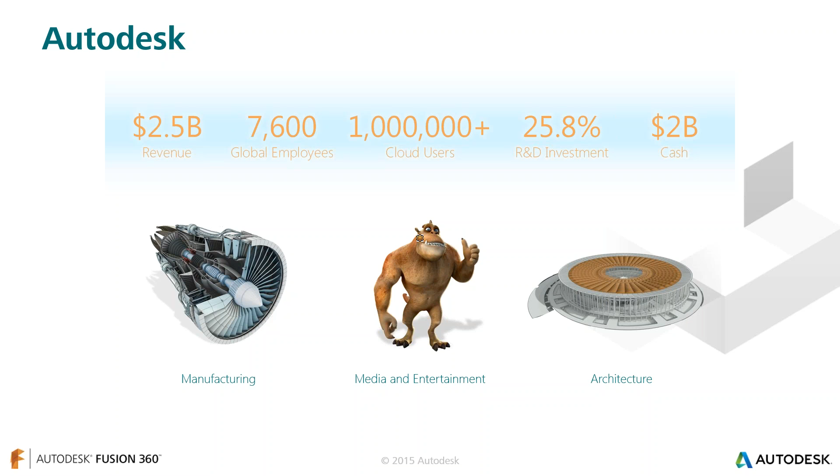Now, there's a very important statistic on the slide because it involves all of us: 26% of Autodesk's revenue goes back into R&D. This is the reason we're able to bring you Fusion 360 today. So as we dive in and showcase the tool for you, you'll see why we believe Fusion 360 represents the most exciting, important, relevant story in our industry today and into the future.

So let's start with business challenges. Traditionally, the software industry has been all about the status quo with typical CAD tools. I'm sure everybody feels the same. Everything up until now has been built on technology that got the job done, but eventually for your business to evolve as a true 21st century competitor, customers expect to go to market at a more rapid pace with more efficient costs than ever before. So there's a need for all of us to be more nimble.

It's true for any industry that we encounter hurdles that can be extremely difficult to overcome on our own, which is why at Autodesk we've identified a need for a product that provides an option for companies to collaborate more seamlessly with colleagues and customers alike. Everyone was using separate and disjointed tools with limited access and flexibility, and typically these tools were tied to a PC, so the overall experience could often be cumbersome. So we made it a top priority to address this and design a tool that has the potential to transform the industry by being able to not only work on any device—Mac, PC, tablet, or smartphone.

Our CAM software is built in so additive manufacturing can become a reality. To provide a little more context as to how we came to this point, we dug in and did extensive research, speaking to people in the industry to get a feel for their pain points. Many of them are colleagues of yours, and some of the responses are reflected here, but overall it was feedback like this: I'm spending way too much time on updates and managing our tool as opposed to designing. I want to get the technology out of the way and focus on being creative.

When we talk about integrated product development, everything gets done under one roof. There's no jumping from application to application—it's all integrated in a tight package with Fusion. When you get your design, you engineer it and make your changes, then it automatically updates for you, while at the same time on the back end all of your data is being managed.

And you can go back at any time and collaborate with people from any device, ask them to take a look at it, share notes. If you have an idea in the evening at home or on the train during your commute, you can access it from an iPhone or on any Mac product. This is unprecedented.

Although this is cloud enabled, it runs local on your workstation. So if you lose your internet connection or want to work from an airplane while you're traveling on business, it works in offline mode, then updates when you log back on to pick up exactly where you left off. You can start your work in the office on a PC, then leave, go to dinner, and pick up where you left off on your Mac at home. Fusion does not care what machine you're on. This is the future of making things, and it's all part of the Autodesk Product Innovation Platform.

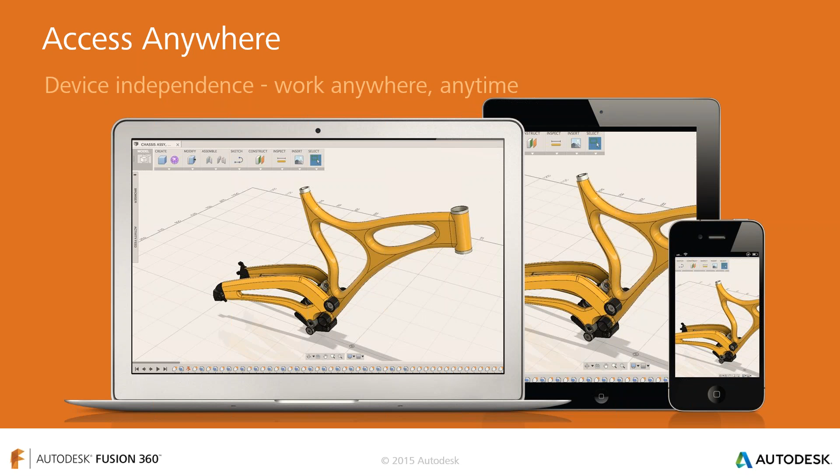Thanks, Matt. I trust everybody can see, should just see a blue screen right now. I'm just going to do a quick logistics check. Yes. And Steve, you and Matt can hear me okay? Yes, sir. Okay, great, fantastic.

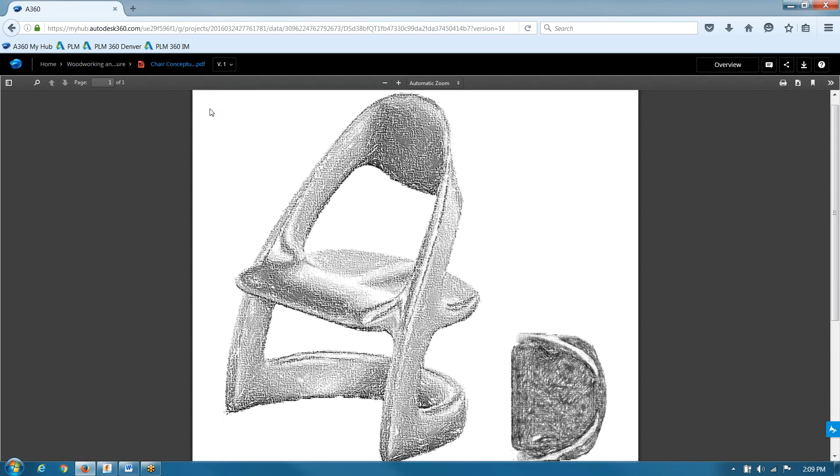What I'm going to use today as my subject matter is a wood chair that was given to me in a pencil sketch. He was nice enough to give me the traditional top, front, and right views. I'll have to admit that I'm not in any way artistic or creative, I'm a mechanical engineer by degree or affliction, a lot of people would say. So I want to show you the tool. I wanted to use a data set here that would resonate with you, and I talked to Steve, and he thought a sculptured chair would be appropriate.

So I'm going to jump right into the authoring tool. This is Fusion, and the first thing I would like to do is go and retrieve that image that was given to me for this project. In Fusion we call these canvases, and the idea is that we want to be able to look at these canvases, trace on top of them, and make our designs. We can change the opacity for it, set it up so that we can select through it.

And we do have a tree. I don't want people to feel like they're out of sorts. This browser tree on the left-hand side shows not just the canvas, but everything that's going to be in our design. So it's very easy to get used to Fusion, it's going to be very familiar.

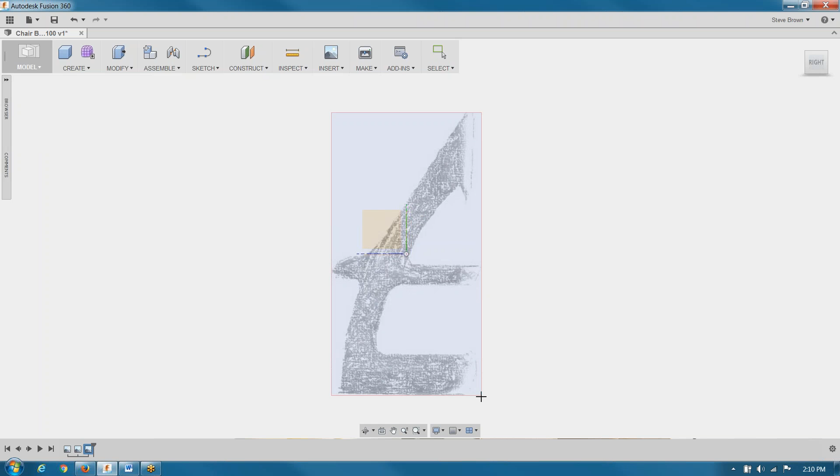The canvas came in, the image that you inserted, you don't know the scale. It's very easy to simply calibrate it here in Fusion. I know this is 36 inches tall, so I pick 2 points and specify that it's 36 inches tall. The canvas can also be moved around, I like to have things kind of faced around the origin. Maybe it's my technical background, but we have a few other canvases in here as well, so it's nice to have them.

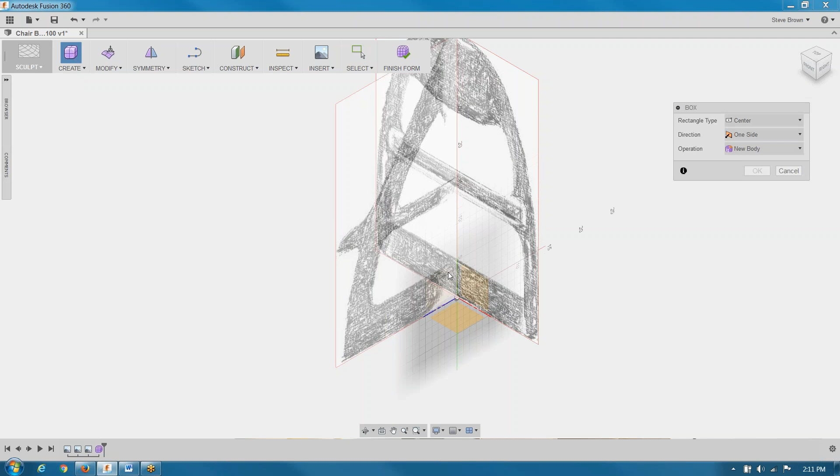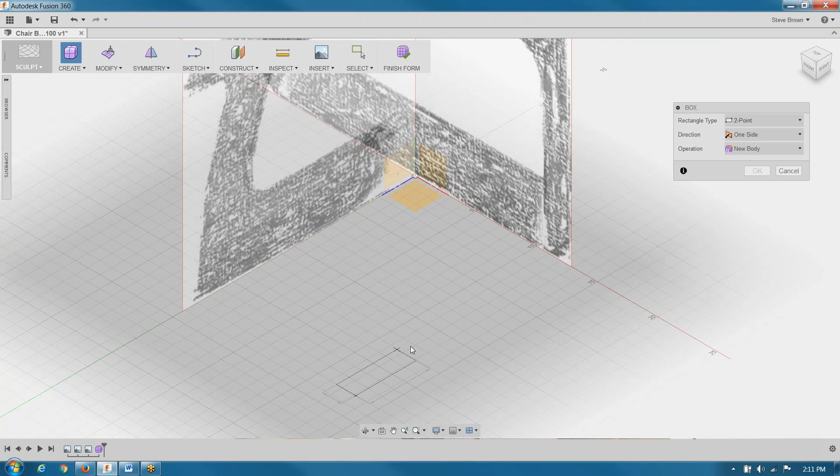Now, in the past, I probably would have started with guide curves or maybe some path geometry in parametric modeling. Being a machine designer, that was sort of what we knew, lofts and sweeps. I'm just turning on a couple of the canvases here, and I'm going to start with an actual piece of geometry, a little cube here. You'll notice in Fusion there's pull and push handles on everything you create. There's also a dialog box you can use if you want to type in exact numbers. It's your choice. I'm going to use 2-point and use a quad box here.

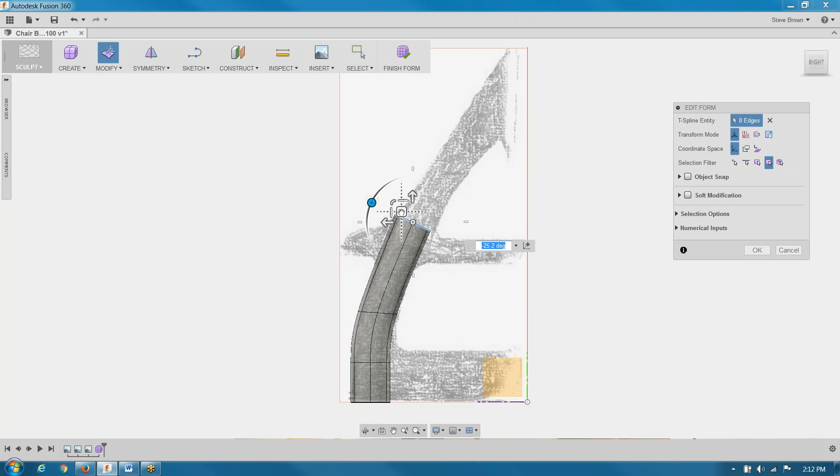So I'm just going to start by shaping this essentially how I would have probably sketched the guide curve. I would have gone in here by hand and sketched a spline or a series of tangent arcs, but this time I'm going to do it directly in Fusion with the geometry. I just start with that primitive and start pulling it around. Switch to a front view, pull the leg in a little bit. I know it's going to arc around across the top, so I'm going to go ahead and rotate this just a bit.

We're going to be doing a lot of this, and we'll go through some of the finer details of what we're doing when we move this information. But suffice to say, I can move edges, faces, or vertices independent of each other.

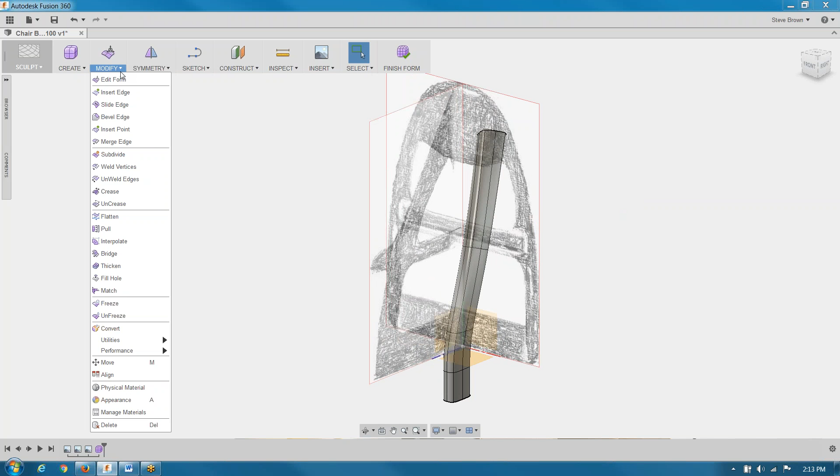Now, this is a symmetrical object. I don't think that's a great leap of faith to go through. So I'm going to set up some symmetry here, using the mirror duplicate command. But I do want to point out the size of the tooltips here. When I started using Fusion, I came from a parametric modeling background. Much like many of you, I've used Inventor most recently, but I've also got a background in SolidWorks, the Creo tools, and others. So the idea of mirroring and symmetry is very familiar, everybody's pretty comfortable with that. It just means that now when I modify this shape, I'm doing it on both sides.

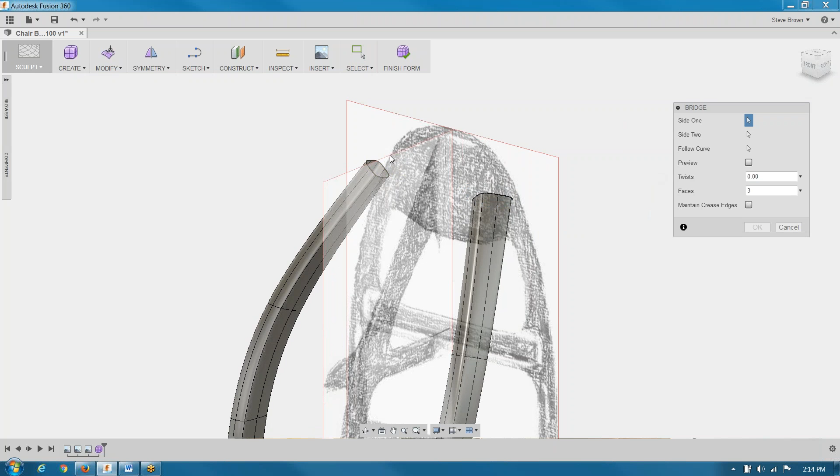I think I'm going to start by connecting these two sides across the way with a bridge. Now that gives me the smooth crossing. Again, there's faces here that I can now manipulate.

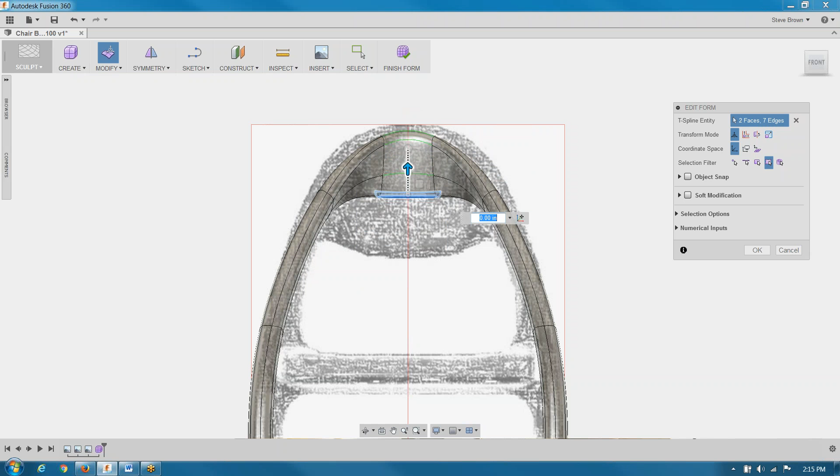I'm going to start just by rotating it up to create the seat back, maybe move it up a little bit, just kind of looking at my sketch. And we'll come around the front and start doing some similar drags and pulls. Again, you can see how when I cross faces, I pick faces inside the box, I pick faces that are crossing the box. Very similar to any kind of Windows functionality that you're familiar with.

So I'm going to just kind of pause here for a second. I'm going to go slow so that we don't get any kind of delay. But I'm just doing this by eye, okay, I'm not really dead set on specific numbers. I'm just trying to get the shape and form down to be something that's close to the artist's sketch.

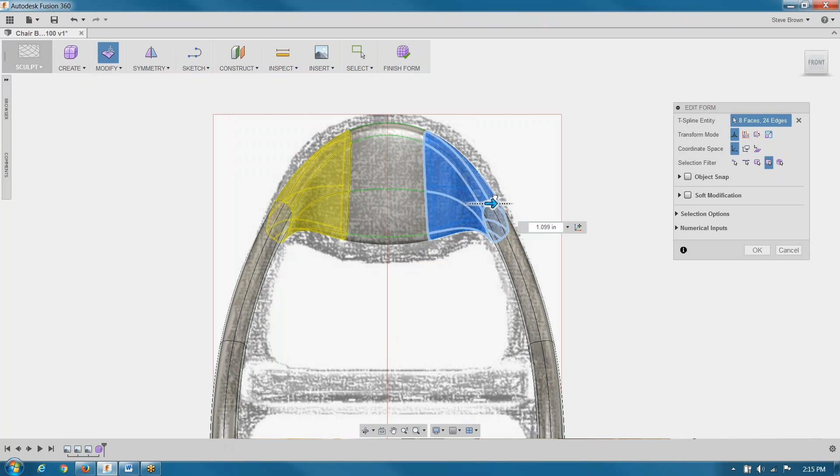It's all about just getting some ideas out here on the paper quickly, right? Let's talk about getting ideations out without having to worry about the tool so much, just getting them into a form that I can work with. I think that looks pretty good to me.

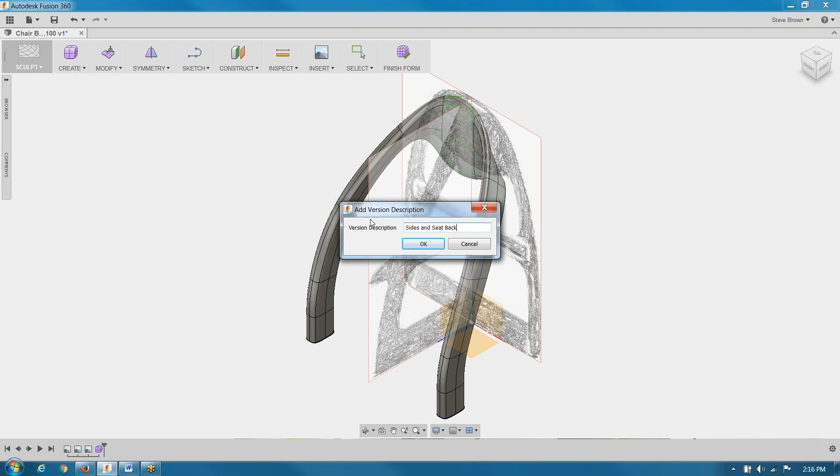So I'm going to go ahead and save this. Now you notice the comment I'm writing, it's going to go with the version. Data management is built into Fusion. It's not an afterthought, it's not a tack on, it's not a third party, it's actually built in from the beginning. Those versions are kept. I don't have to do anything overt, I don't have to check in, I don't have to check out. I just simply save and put a comment, and my thoughts are recorded.

Now I'm moving this edge down a little bit. I'm going to work on the seat bottom. Pulling the edges around really gives me good control, but sometimes I want to add an extra edge to give more control. The toolbox here, the little sculpt toolbox that pops up, that's just my S key. It's great, it pops up right where my mouse is. I don't have to go searching through menu bars. I can type in a couple of letters and it gives me all the corresponding commands available that start with that. In this case, I'm inserting an edge.

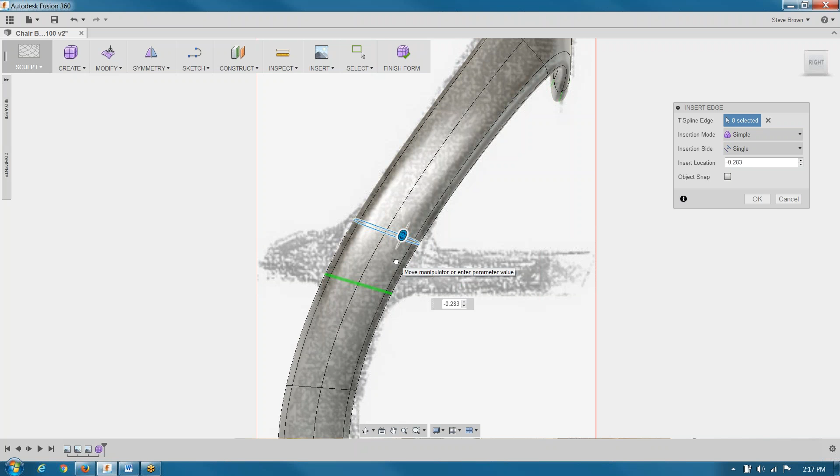I can insert one edge on either side of the existing, I can insert two. I think I'm just going to use one in this case, and we'll move it about here, should work. Again, all these edges can be moved independently after they're created. They're not locked into position in any way.

Now, the reason I'm doing this is I want to delete some faces. Just pick a couple of faces and hit the delete key. Notice how Fusion automatically rounds off the hole, looking for that curvature continuity. If you notice when I was dragging, Fusion was doing the same thing, trying to make sure all the edges maintain that smooth curvature.

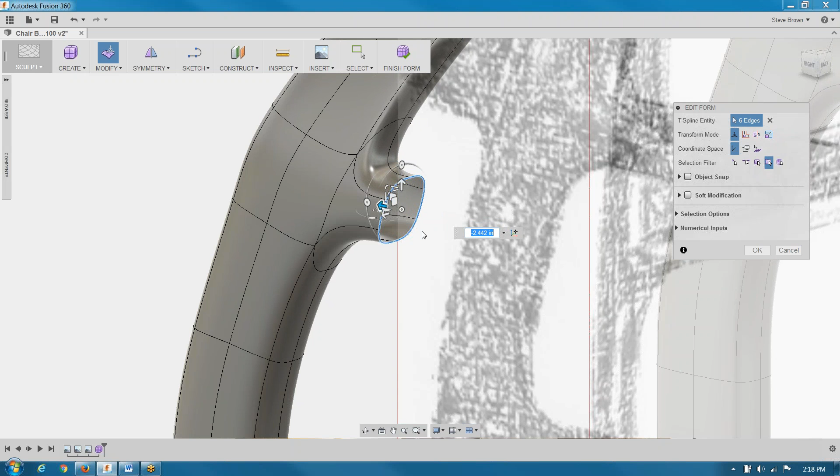Now I'm just going to pull this out a little bit to try to get some material to build my seat bottom. I'm going to stop right there and take a look at it from the right. If I want to straighten this up a bit, I think that would be a good idea. I'm not trying to match it exactly, but keep in mind that moving edges, faces, and vertices is all based on how you select.

So here's this leg that's just sort of sitting out. If I just grab those pieces, I could move those around. You can see how the corresponding geometry follows my lead, keeping curvature, keeping that smooth shape. For me to do that in the past in parametric tools, how many guide curves or path profiles would I have had to change there? I shudder to think - I probably couldn't do it.

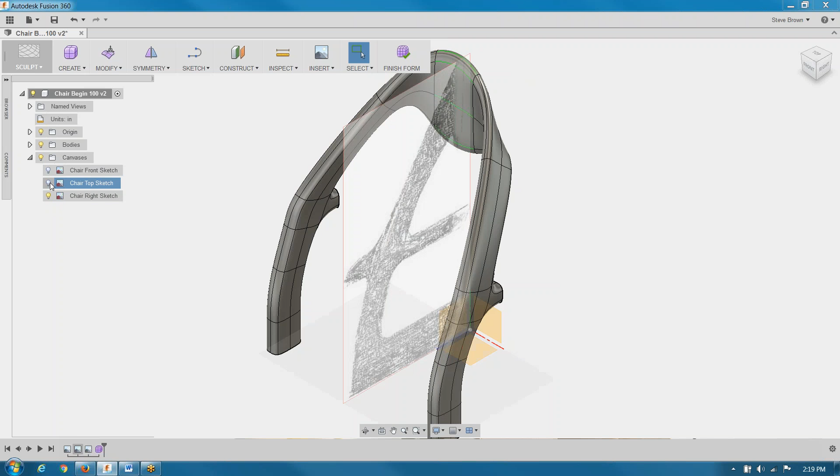Now, before I start working on the back of this seat bottom, I'm going to turn on my other canvas - I have one down on the floor there. I'm also going to use a section view, just for the sake of visibility, to minimize the amount of information I'm looking at. I'm not cutting my model in half, this is purely a view control. In Fusion, we call them section analysis. Again, you have tick boxes, you can type in exact numbers, but I prefer the pull handles - it just makes life a lot easier.

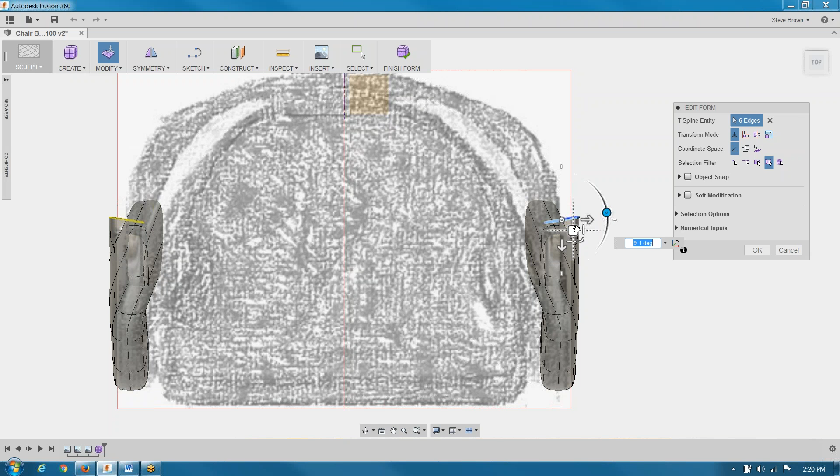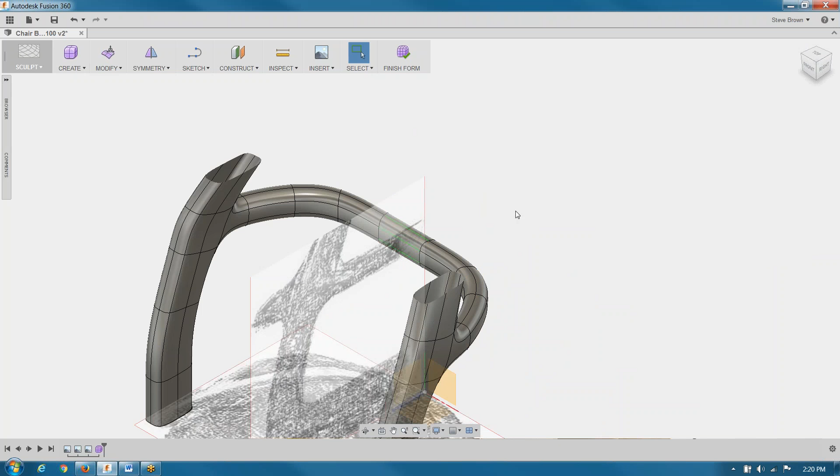So much like I did before, I'm just going to rotate this edge a little bit and start pulling just to get a shape that I think I can work with. That looks pretty good. I'll use my shortcut key because I have the bridge command on there, which is one of my favorites in here. Hopefully we'll get some things to go off and we can look at some recovery. But so far, all the shapes that I am doing are coming out exactly how I had envisioned them.

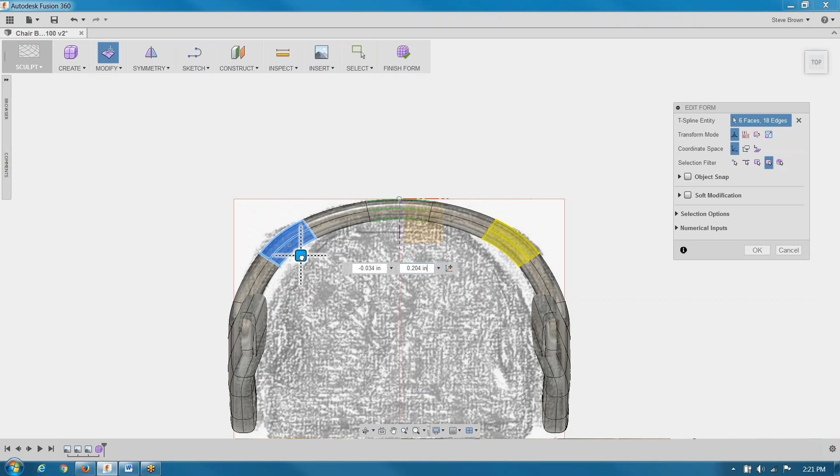Notice the manipulator has arrow handles that pull in the direction of the axes, right? So I can pull in and out, I can move in a specific plane. When I'm pulling on these, you'll see that's what I'm doing most of the time, pulling things in world coordinates. You can use local coordinates, and you can define your own. The center pad that I'm hovering over now moves along that plane, but I'm not limited to a specific direction, so I'm staying parallel to the screen here but able to move those faces in that direction. The same manipulator is available for edges, vertices, and faces, which is something I really like about Fusion - the consistency of the interface.

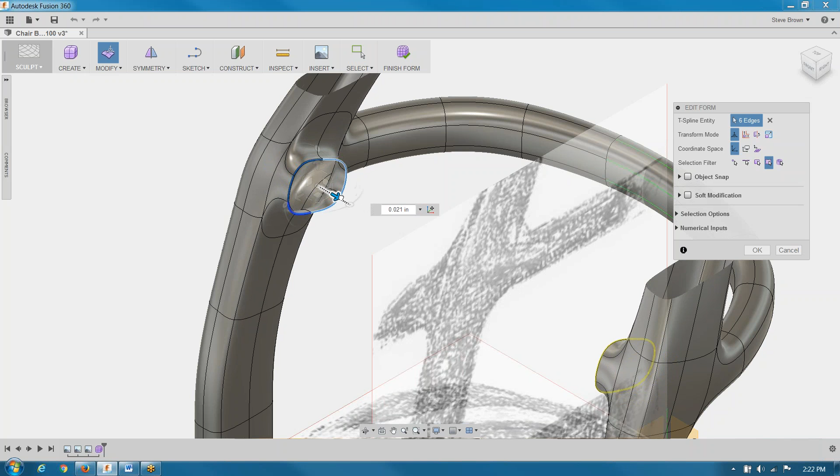So I'm going to save this again, creating another version automatically here, and we'll start working on the front here. In much the same way, I'm going to pull the front of my seat frame across. Now I'll stop midway and just start manipulating this.

In this case, I'm going to use the manipulator that's the scale - it just scales in the Z, so in my views in Z here. So we can move, we can scale, stretch, all with the same manipulator. And we'll bring that across.

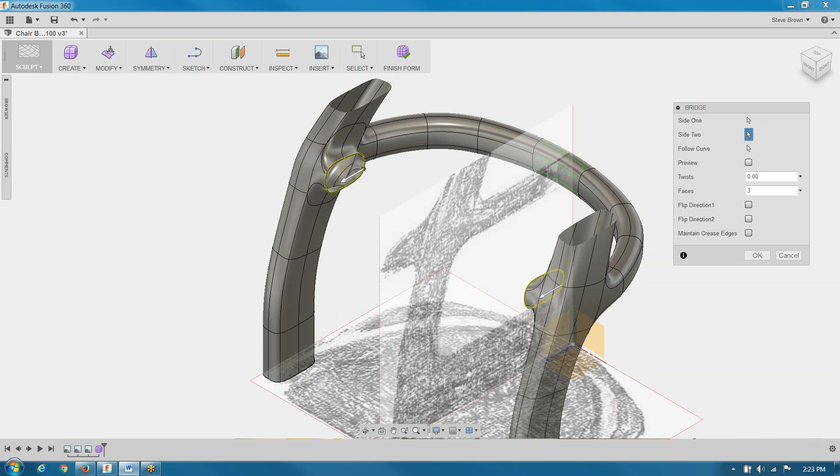Nice. Now, I wasn't too concerned about that one when I positioned the profiles, because I know I can always come back in here after the fact and edit these as a group. So just looking forward on the chair, I can pull this down and take a peek to the back, and I want it to be roughly the same level as the back. It's not critical, because I'm just going for a very friendly shape, not so much a hard-edged engineering shape.

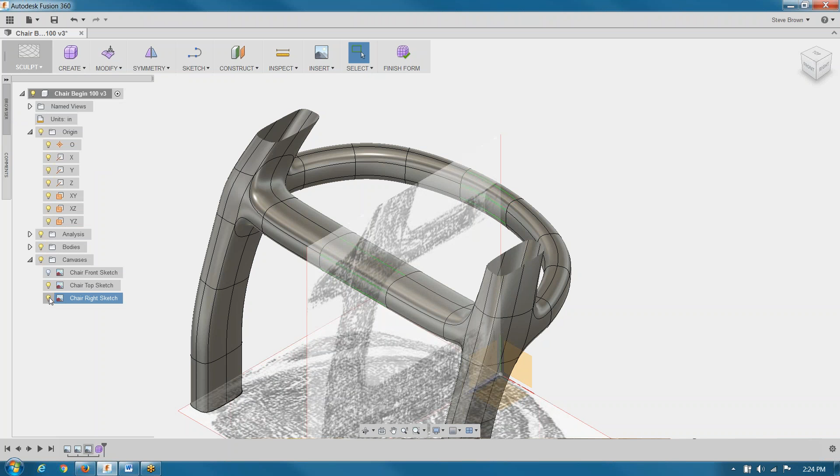I'm going to turn off that right-hand canvas. I don't need that anymore.

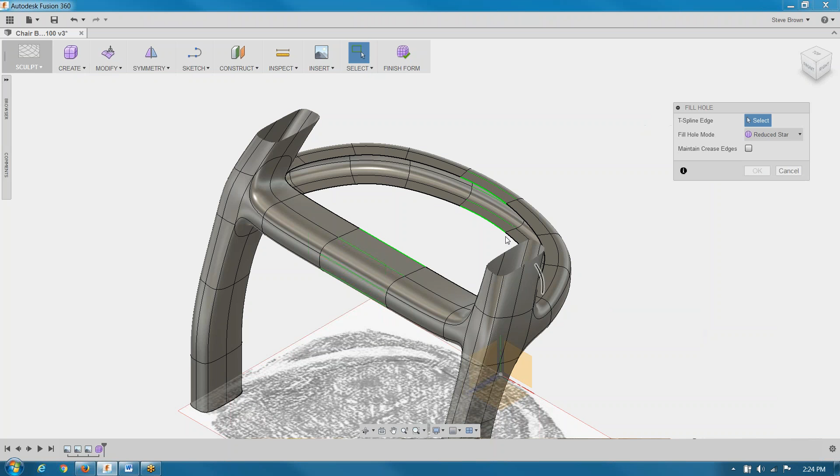Deleting a ring of faces now allows me to work on the inner seat area. In this, I'm going to fill that gap with the fill hole command. Again, it's just select a single edge, and we get this surface in here. There's a couple of options you can take in here - I like the reduced star, and we'll throw that in. Then I'll just repeat the same command for the bottom.

I'll save another version.

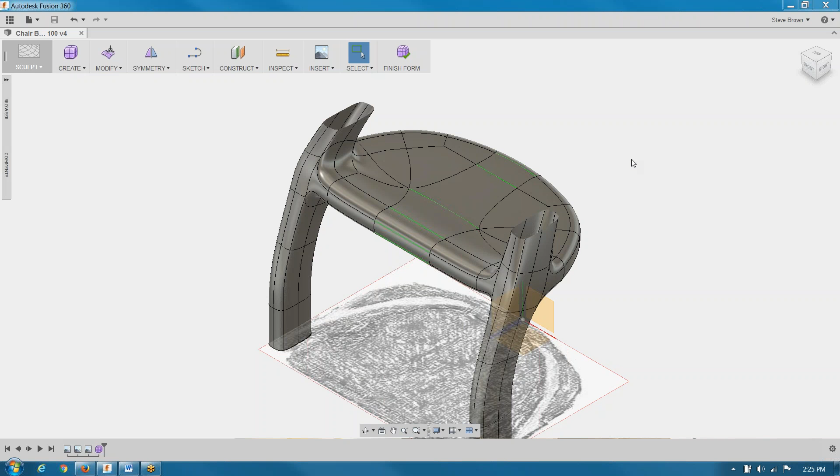I was glancing over at the chat and haven't seen anything come in, so this is good news. I'm going to continue here and work on the seat bottom a little bit. Keep in mind that when you have large faces like this, you can't exert a whole lot of control on them, because you're going to be pulling those entities up all together.

So you see how I've created faces before by dragging. This time I'm just going to subdivide this up into multiple faces, and I'm going to specify that I want 3 faces in one direction, and no subdivision in the other. So where I had 3 large faces, I now have 9 smaller ones running in the direction that I desire.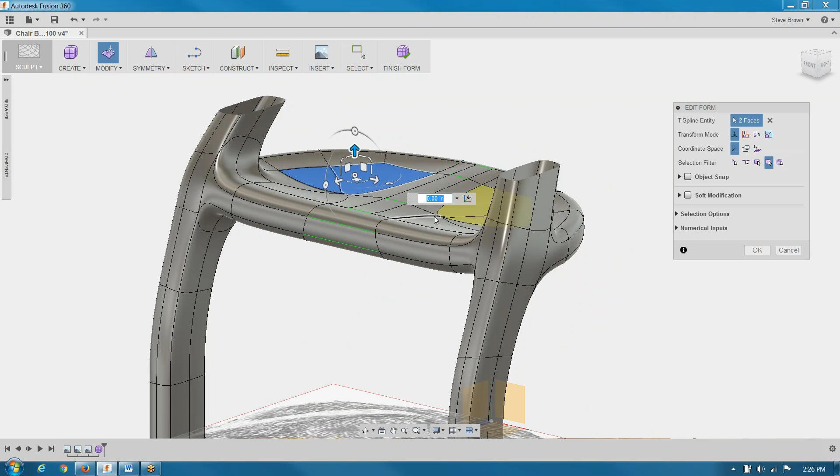The reason for that is I want to take these seating areas here, and I could pick more faces, or I could probably even do it with edges if I like. But I just kind of pull this up, pull it down. I just want to get a nice curvature to the seat bottom, nothing drastic, just very gentle. You see how it maintains that curvature with the three faces in the middle that I created, and it just spreads that gradual curve out across the entire bottom of the seat.

Now, optionally, I could do the same thing on the front of the seat to the leg arches. So I'll just pull those down, and we'll kind of peek back. Again, I'm just doing this by eye. I'm really looking at the angle that this sort of fades back, and that fall off looks pretty good.

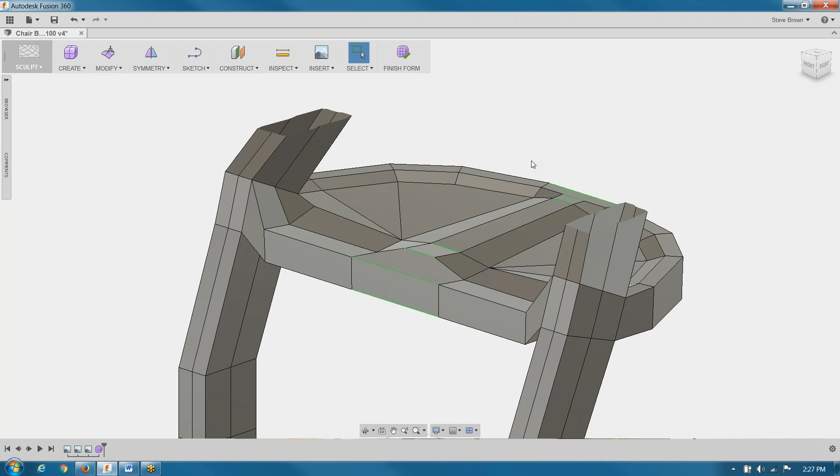Now, I do have a little higher section here, and I want to take advantage while I can to point out that we can switch to polygonal mode as well. So if you're comfortable working in polygons, that's now like a Fred Flintstone seat. I'm intentionally switching back, and I can really see in this mode, Fusion gives me a strong insight into the vertices and edges that are going to be most effective at smoothing out that hump. So I'm just going to use that mode to pull that up, put it back into smooth mode.

And I'm going to call that money.

Now, I was pulling edges before and faces. I'm going to do that again, a little slower this time. You notice when I pull these three faces out along this axis, I'm going to pull them directly, but I sort of get that flying buttress effect there on the uprights.

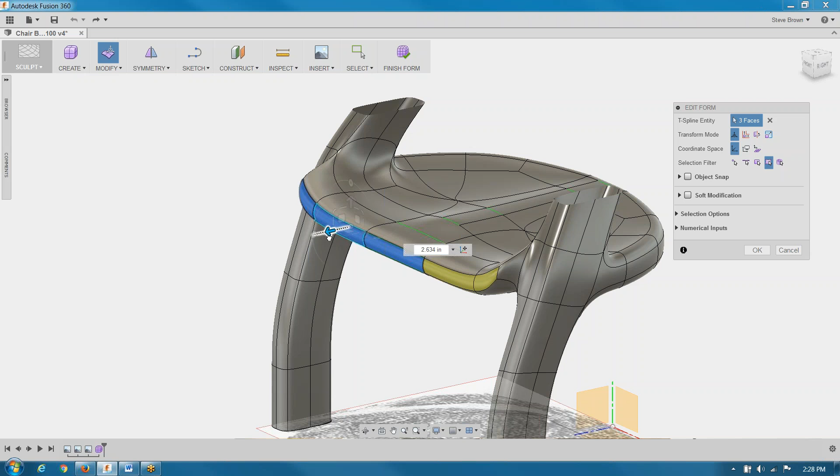That's because I'm not adding any segments, I'm not adding any faces, I'm simply pulling the existing ones out. By simply holding down a modifier key in Fusion, you can get drastically different results. In this case, holding the Alt key while I do the exact same drag adds faces and gives me a much more desirable sort of nose on the chair. So similar commands, similar actions, but just a little modifier key to help you get along.

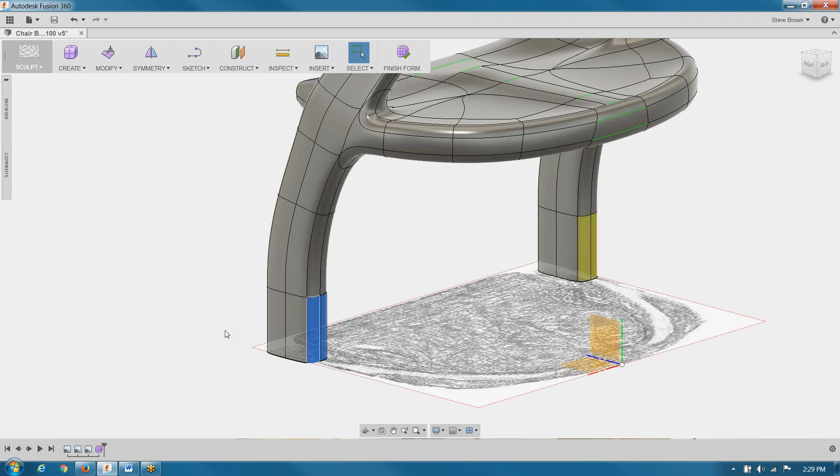I'm going to delete some faces, and remember, Fusion is very good about smoothing those curves back up. I'm going to use the Alt drag command that we just discovered to not only drag that edge out, but to drag it with faces, adding material to my design.

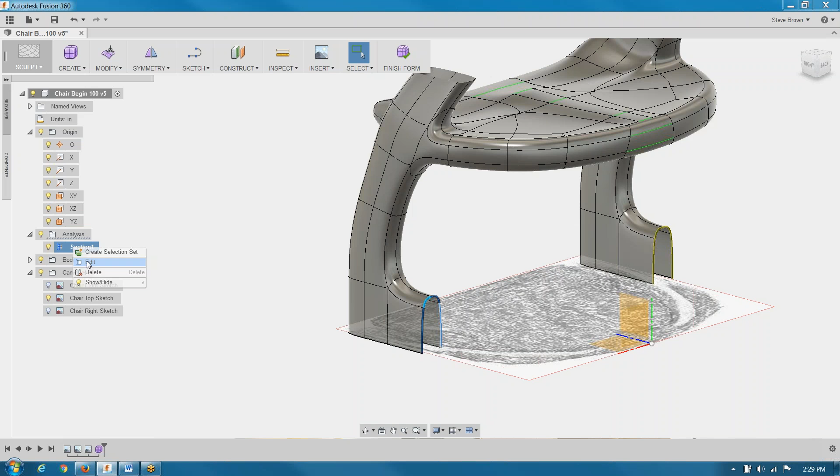I'm going to pause it there. I'll go back to my browser tree. I'm just going to edit that section view. I'm using it now, but now I'm a little farther down, so I can edit that, bring this a little farther down. Now I can get a clear visibility, probably a straight top view.

Remember, double-clicking an edge selects the entire loop, which means that I can twist that edge, and now I'll pull it in plane, and this time I'll pull it in plane with the Alt key so that I add some material. A little bit of training, which I typically don't like to do in these settings, but I think it's important to give a little bit of insight, man behind the curtain if you will, of what I'm doing here.

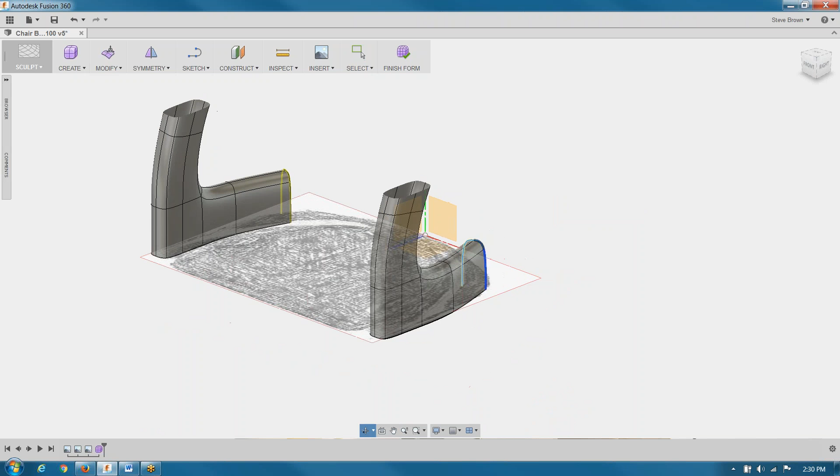So I haven't had to use preview yet. Let's see if I can get this to crisscross. Let's see if we can showcase the preview ability.

Yeah, there we go. I've never been so happy to have something screw up. So when you're dragging and pushing models around in this free-form environment, it's inevitable that your human eye and your hands just move things to the wrong spot.

Fusion is great about putting it in that polygon state, so it's easy to see and really tell what's going on. I've got some crisscrossing here in that last bridge command. Simple undo.

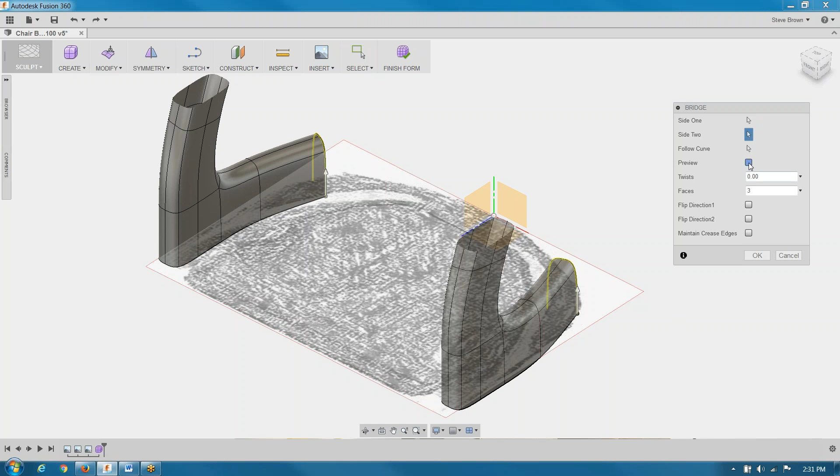I'll repeat the bridge command, only this time I'll use all the tools available instead of just a couple. Rather than picking points or dictating edge to edge, I'm just going to turn on the preview, and I have a few buttons here that I can use to flip direction. It's just flipping the profile direction of the two.

So with the preview on, I get an idea of what I'm going to get. I can increase or decrease the number of segments across here in the back. I do want a segment right in the middle, so I'm going to go with 4 in this case. Or I guess an edge right in the middle.

And then we'll clean this up a little bit with some pull. I'm going to be careful here. I just want to go straight back with that in axis. That's why I'm on the arrow.

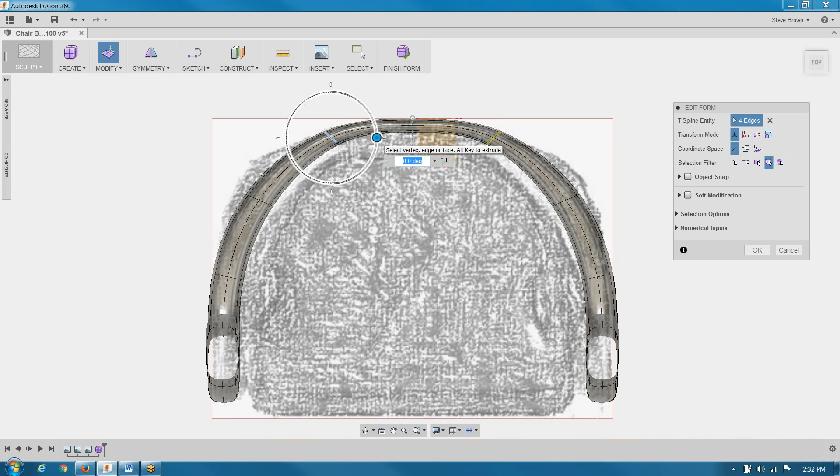If I want to change the profile in that area, I can straighten up these edges and make them point more towards the center of my arch. I'm just kind of going by the sketch. I think that's probably pretty close.

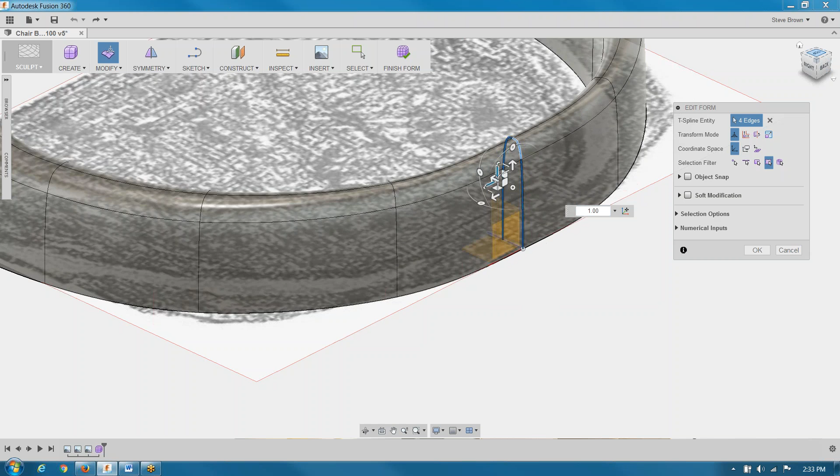Let's take a little closer look at this edge here, this hoop. This is a really good place that I like to highlight the ability to scale on a specific axis with this manipulator. You can see how I'm just adjusting the curve in that one direction, so there's no fear of dragging that in the wrong method, in the wrong direction.

Top view makes it even easier to see. It just means you can get your job done a little bit quicker, getting that shape out for the next design.

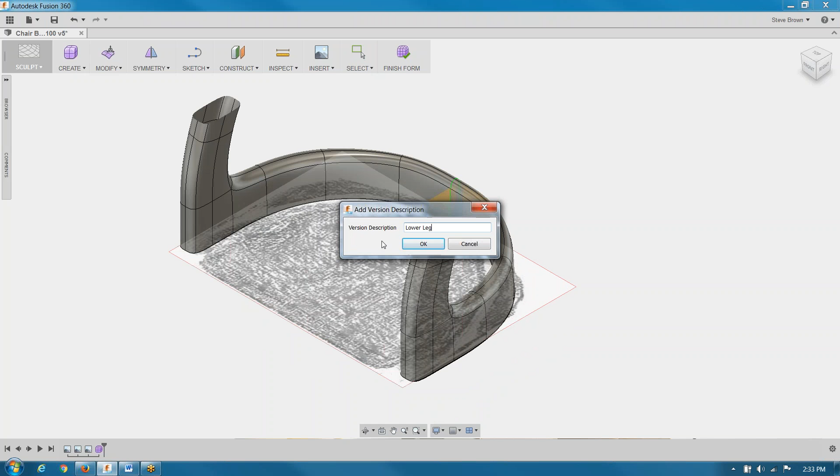Now I've been using the Edit Form tool. That's the one I've been using when I pick faces—in this case, these two edges, faces, edges, or vertices, and the Edit Form. I've been using it in just its most basic form, right? I'm just going to pull these edges up and down, and the continuity is just maintained for me.

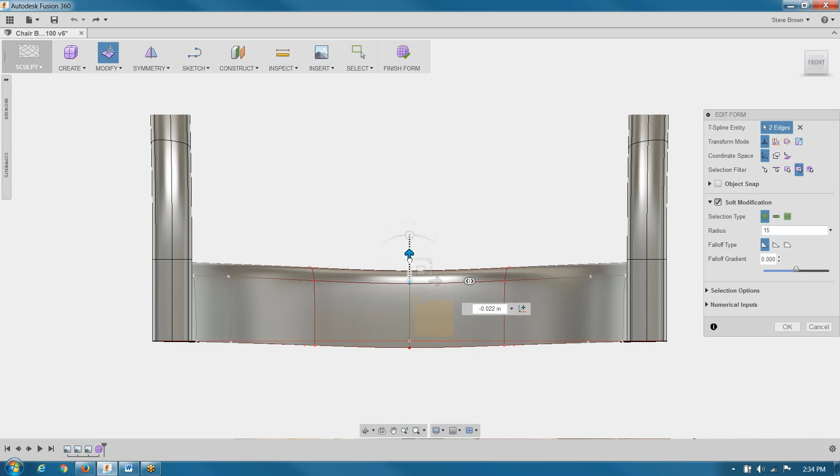But I do want to highlight the idea of soft modification, meaning I can spread in a circular fashion the radius of effect for this pull. When I turn that on, I have a value here—I'll set it to 15 inches. And you'll see red dots appear that show me those things that will be modified, propagating in a circular fashion.

Now there's a couple of different ways you can use this. I like to use it with a smaller radius, maybe something like a 3, so I don't get down to the bottom. I don't want to move the bottom edge, I want it to stay nice and straight.

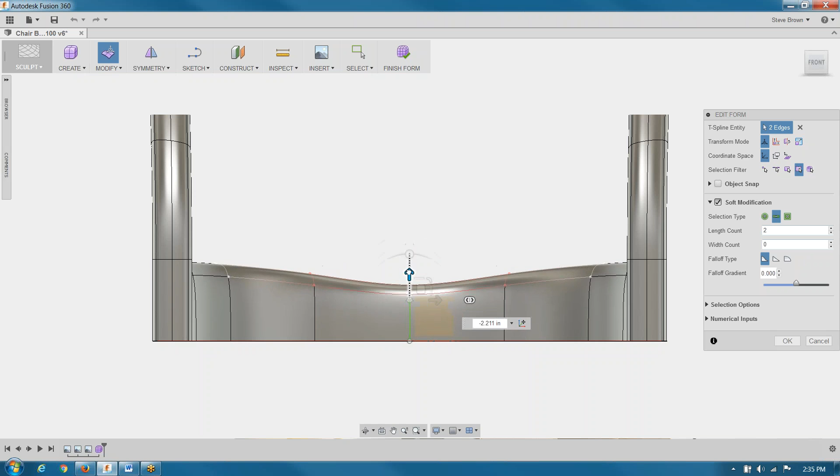But I also like the rectangular version. Now instead of a radial sphere of influence, I can count the number of segments or faces that I affect. So I'm going to dial it down to like 2 going left to right in the horizontal and 0 vertically, if I just want to affect this top edge. If I increase the number of faces I affect, I move farther out.

There's also a gradient slider that you can slide to get the look that you're after, and there's also fall off types—this one I'm using is the smooth. There's a linear fall off and then a spherical as well. So instead of just simply pulling and pushing, you do have control over a wider range than just the faces that you're affecting.

So I'm going to turn off my section view. I'm going to turn off my origins. I'm going to go ahead and finish this out, and I'm going to say that's a pretty good shape. I'm going to call that the form part of it.

Done. Now I still have a little bit more work to do in this chair, but I do want to talk about the collaboration a little bit.

You know, when I first logged in, I was using Firefox—you can kind of see it down here. But it is good for any browser; Google Chrome is very popular. You simply log into your hub.

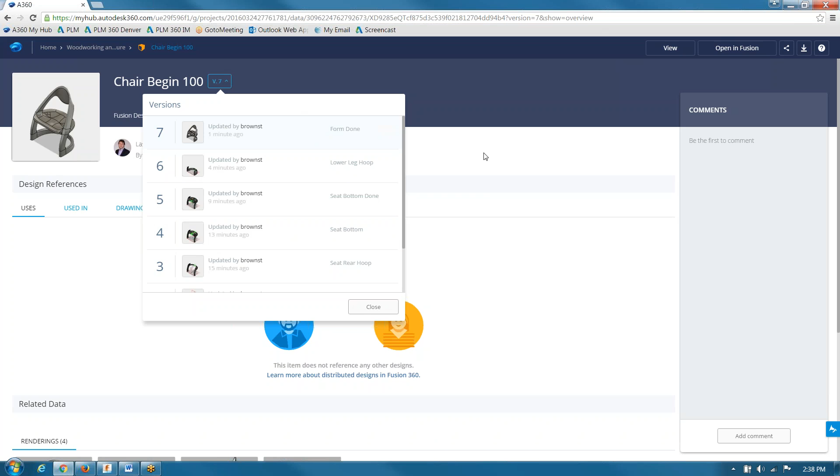So he has the ability to log in and look at this design because I've invited him into this project. All the versions that were automatically created are listed here as well. He can go back at any one of those saves and view one. And you can see my comments are here as well, so I make sure the comments are meaningful. Not only can we view these as a project member, we can actually promote one to be the most current version if we decide we went off track somewhere. He can also download this file.

Now, I want to point out that there is no such thing as Fusion 360 2016 or Fusion 2017. If you have Fusion, it's the same version today, yesterday, and tomorrow. There is no file compatibility issue, no backwards or forward compatibility—that just doesn't exist anymore. If I invite you to this project, you can download this Fusion file in any one of these formats listed. If IGES doesn't work for you, you can come back and download a step or an SAT. No more do we have to go into the CAD tool, save as, email, FTP, box, take your pick, and then do it again if the IGES file didn't translate right or the step file.

This is all self-serve. The way we do that is we declare that we can share this model with that user. We can even share it with anybody on the web and just have them view it. So I can copy this, and I can paste it, and then users can view that model, but they cannot download it. If I decide I want to give them download access as well, I just flip the switch.

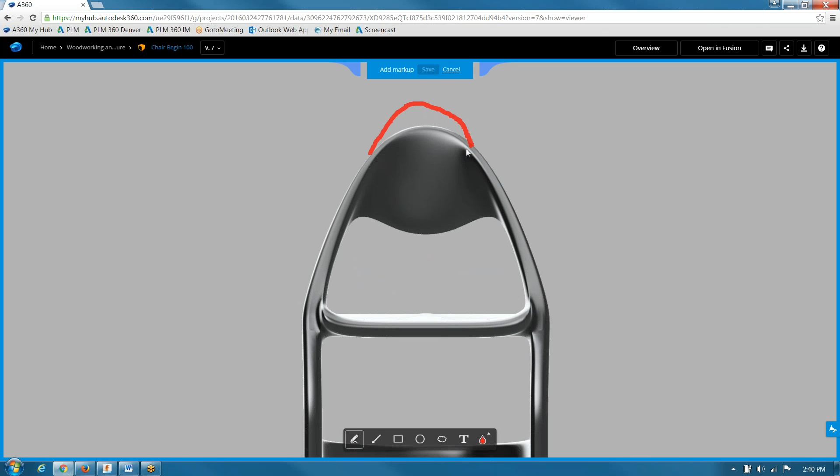More importantly, without a CAD tool, without a CAD install on any box, any device, Bill can make suggestions. Maybe he wants me to raise the seat back. Maybe he wants to put a hole in the middle. Maybe he'd like me to do some other things that are just text-based.

This can be saved as part of this project. Now it's logged under his name because he did it, but I can reply to it, and he can even add further comments.

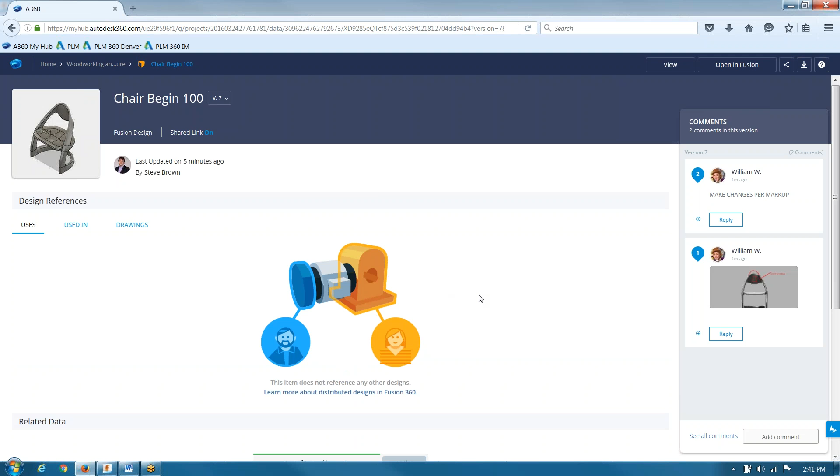So I'm going to close out as William. I'm going to go back into my project and look at the exact same piece of work that I've been working on. And you'll notice that there's William's markup—there's his comments, all in real time. Any device, anytime, anywhere.

Inside Fusion, there's comments in here as well, the same comments, mind you. So William asked me to make some changes. Here's the markup. I can get started.

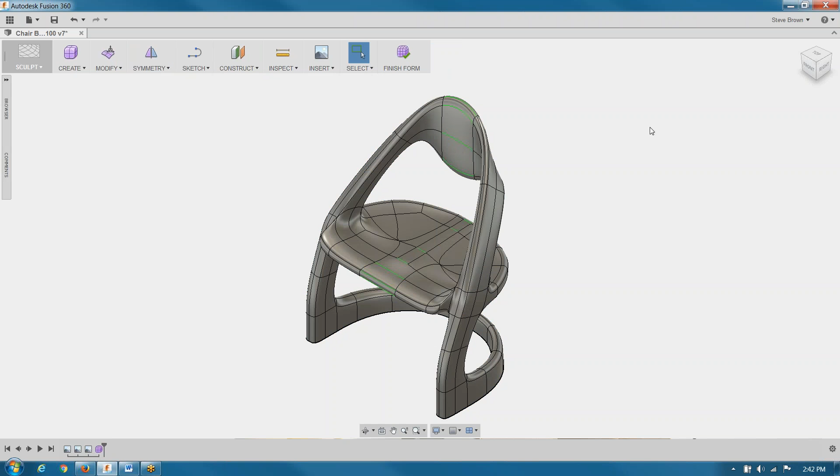Now he's asked me to increase the height, put a window in it. In the past, I might have to sit there and spend a few minutes—actually for me, more than a few minutes—deciding what I would have to do to make this possible. Which guide curve do I have to touch? Do I have to add sections? Can I even do it without sketch relations blowing up in my face? And then, what about the rotating? I'm not so sure if I could even do that in a traditional tool with guide curves. It certainly would not be fun, and I wouldn't be enjoying myself.

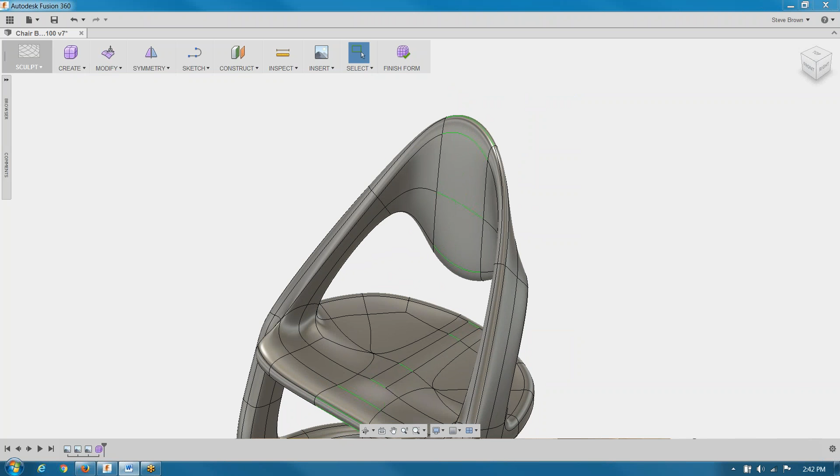Certainly, as an engineer. Now, as far as the hole, we'll use a trick that we've used before. I'm going to pick a couple of faces, subdivide that in 2x2 squares, and do the same thing in the back. This does not change the topology of the surface underlying—it's just giving me more control, more things that I can tug, pull, push, and in this case, delete.

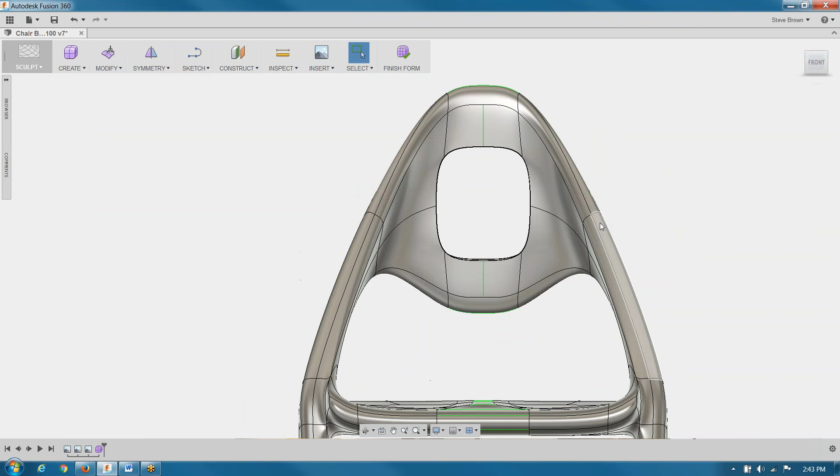So I could pull those holes around a little bit. I can make them different sizes. Actually, I'm pretty happy with the results as they are, so I'm just going to bridge them.

Now that's a pretty nice bridge - it rounded it off. I'm going to undo it because I want to point out that this is an environment where we have traditional parametric modeling, sculpting, and surfacing tools as well. So maybe I want to leave those hard edges there and sort them out later with a traditional fillet or chamfer, just to knock the edge off. You can disable that smoothing and go back to your more traditional tools, or look at it a little later from a manufacturing standpoint.

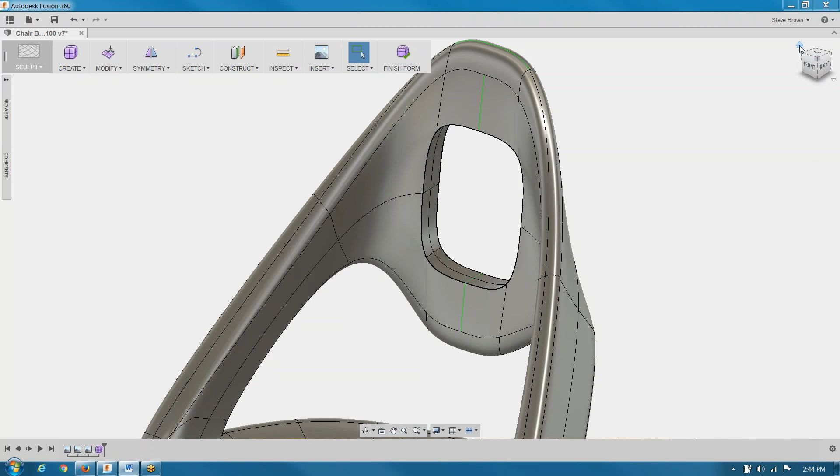I'm going to make this a solid now. With the boundary fill, Fusion lets me pick any multiple items - I can pick surface bodies, reference planes, other solid bodies, and create this new complete solid body. Those of you familiar with multi-body assemblies or multi-body parts will be very comfortable inside Fusion.

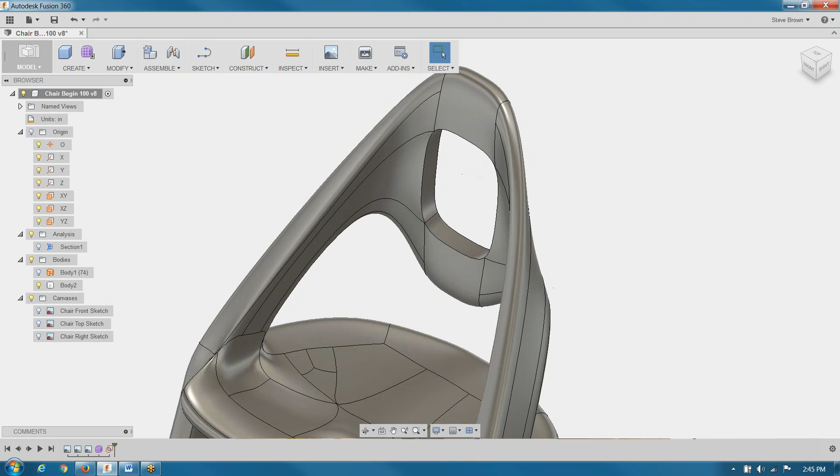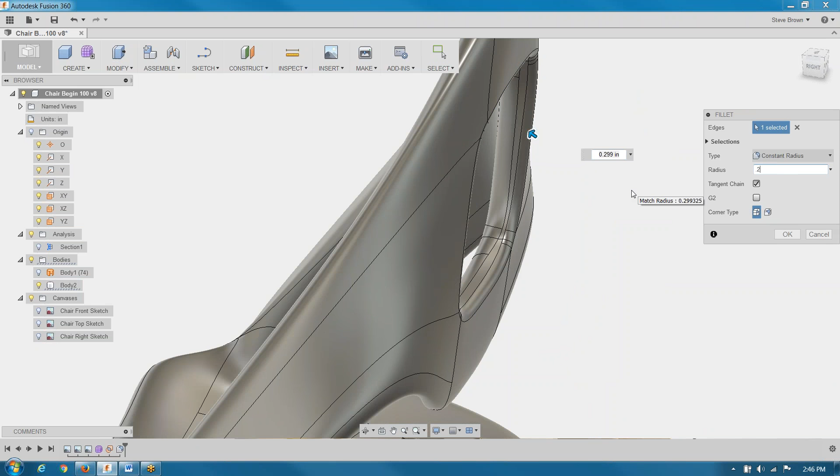Just to show you, there's a legacy surface body there, and we'll just hide it. Now we have our solid body up front. I'll grab this edge, pull on it a little bit. Put a radius, maybe 0.2. Yeah, that looks good. Do the same thing on the back - maybe I just want to break the edge a little bit. That'll work.

Notice those are traditional fillet features - you can see them down here in what is essentially a feature history. We call it the timeline. You can drag this backwards and those fillets will disappear. You can edit those fillets. So this modeling environment I'm in now is different than the sculpt environment I was in before. And there's also a patch environment that lets you do traditional surface modeling.

Notice I haven't done anything knit. I haven't trimmed surfaces, I haven't sketched anything. I've just been dragging around, pushing and pulling, getting the design out as quick as I can in these sort of shapes. And that's where Fusion's strength is - getting those ideas out quickly.

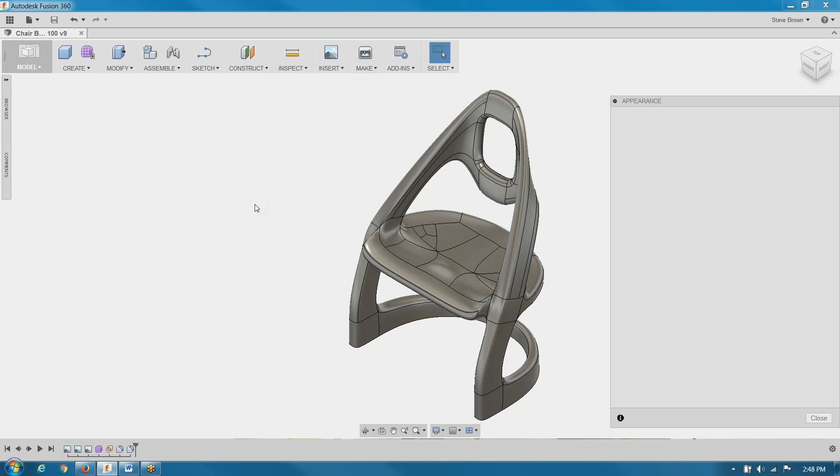So let's apply some appearances here. In fact, I think I want to do the appearances in the render environment. I can do them here, I can do them in the model environment.

So let's put a wood finish for this audience - I think that would be good. Now this is a mahogany right out of the Fusion library. I'm going to zoom in here a little bit. I realize there's no way you're going to carve this out of a single tree - we'll get to that, unless you're really good, I would think. We'll get to a little more detail on sectioning this up into bits and pieces in a minute. This is a good way for me to show the appearances. This is the out-of-the-box mahogany.

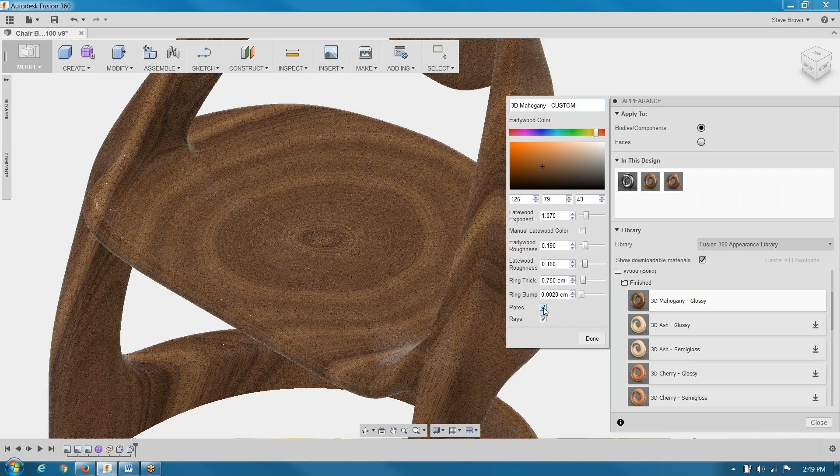If you use any of these standard finishes, you can duplicate them and make your own, so I'll simply do that. I will make a custom mahogany finish, and I'm going to simply remove the pores from this appearance and then apply that to my chair. So what you'll see is - well, you understand better than I do the idea of these pores. It was something I didn't really realize - I had seen it, but I didn't know what they were called.

And I'll just edit this. Since this material is used in this assembly, it updates live. I can check boxes to remove or add pores, I can even change the color slightly if you want to change the hue. I don't believe there's any such thing as a green mahogany, but suffice it to say that if you can't find a material or finish appearance in here, you can take one that's existing that's close and modify it to make it your own.

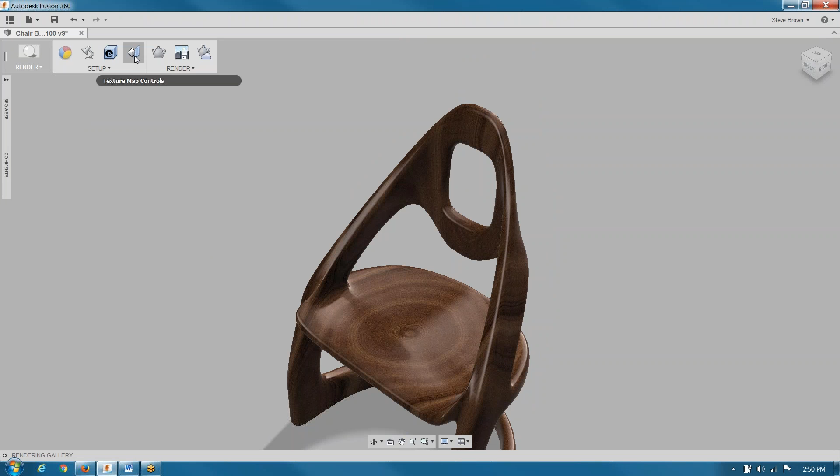So into the rendering environment, where we can make some more significant changes to that texture rather than just turning pores on and off. We can actually take the map and start moving it around. So now we're cutting this chair, instead of right up the center of the tree, we're cutting it sort of off to one side out in the rings.

And you can move this grain structure up, down. You can rotate it, and I'm going to show that in a little more detail in just a few minutes. Right now, I want to get through the rendering phase. So the rendering environment gives you the ability to move those texture maps around a good bit more.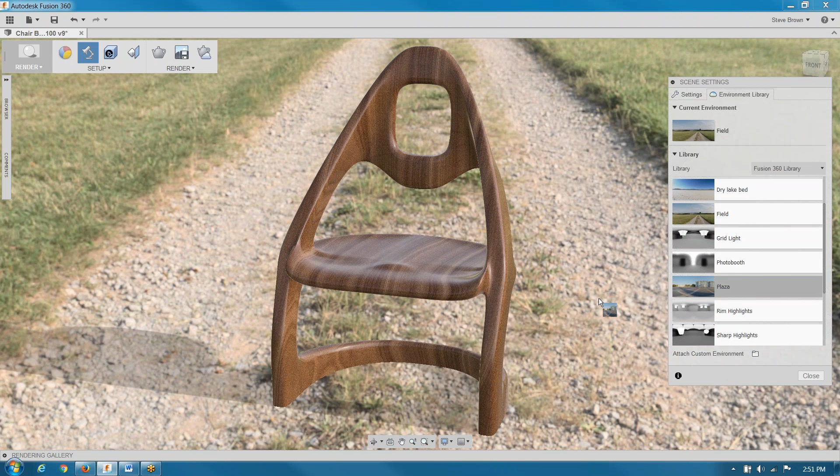Of course, you also have the scene settings, the background. We have these HDR environments, so if you want to put your design in the middle of a gravel road, you can. It's there for you to do so. If you have an HDR environment you want to bring in, you can do that as well.

The Plaza, I always like the Plaza. It showed up in some of the other Autodesk tools. Move the chair, shadows follow, and so forth. There's also photo booth-like environments here as well, which is what I use more often than not. The outside environments are nice and all, but generally speaking, people don't take pictures of chairs out on gravel roads. Or maybe they do, I don't know, I guess I should be careful.

We'll use the solid color background. I'm going to rotate this around a little bit and find a good place to take a picture of this. I think that's a good one.

Depth of field, absolutely. You can set your blur to kind of focus that down. I'm going to pull this up a little bit and have it focus on this top corner of the chair.

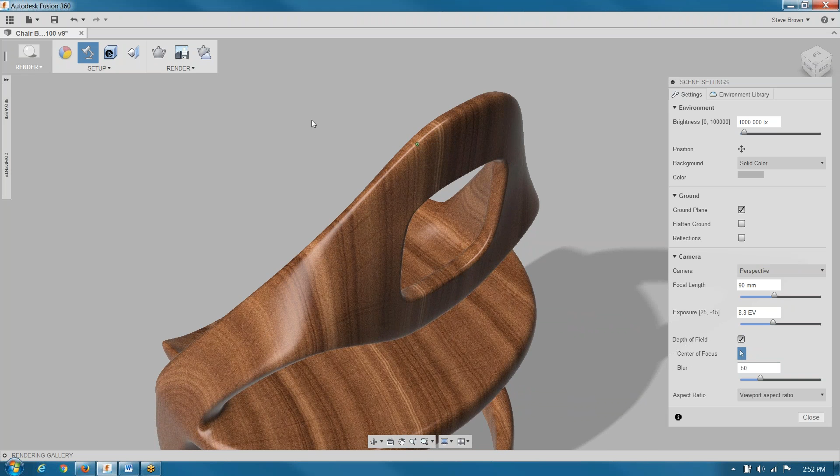We'll turn on ray tracing, and we'll talk a little bit about the challenges we've done in the past with rendering. Normally right now I'd turn on ray tracing, my fans would kick on, my second, third, and fourth CPUs would start cranking out, my laptop would get hot. It's very intensive, not that it's a bad thing. It's just that as this image refines, you'll see it as I speak, it's slowly refining to get better and better resolution, tracing each ray of light that bounces off this chair to calculate it appropriately.

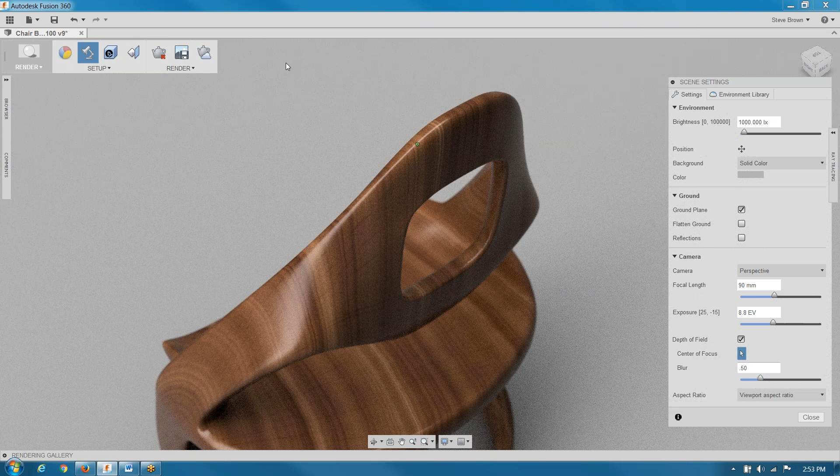Now I can render this locally, just like we've done in the past. I just capture this image, I tell it what the resolution is, I hit OK, and I wait. But the beauty of Fusion is that because it's cloud-based, I can push this work off to the cloud. That does two things for me: one, it takes it off my desk, and I don't have to worry about it anymore. There's some custom settings in here we can cloud render, or you can pick some of these presets we've done in the past. So I just hit render.

You can think of it as just putting it in the oven and letting it bake. And when it's done, I can go down here and look in the rendering gallery. You can see some other ones here that have been done previously. And this one will clock down and show up in my rendering gallery a little bit later.

Cloud computing—I hate to say limitless because obviously there's some finite number, but compared to my laptop, it might as well be unlimited processing power. So we'll check back on this a little bit later.

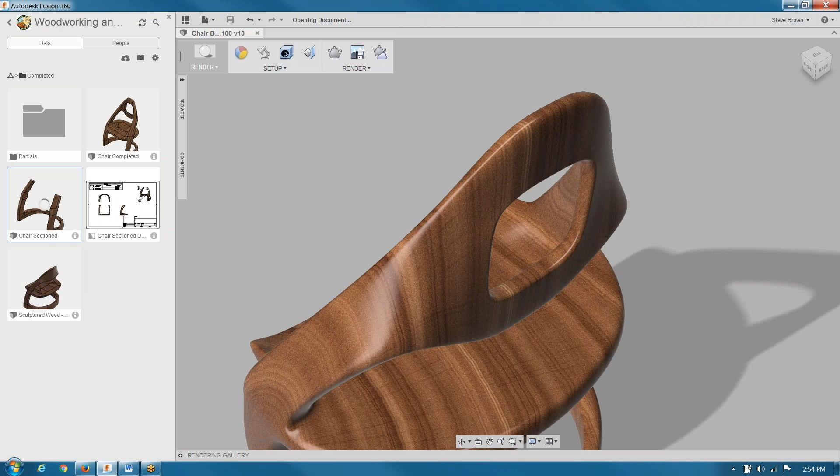I promised to show you some of this chopped up into more manufacturable pieces, and I did that. I created a chair similar to this one and took some representative cuts. Didn't do the whole chair, just did a couple of pieces.

Most importantly, know that there is a sketch here. If I go to a right-hand view, you see what I've done—I've taken a sketch, a plain old sketch, drawn a line, put an angle on it, and simply cut that leg away from the base. So there would be a joint here, whether it's mortise and tenon glued, probably something a little bit more elaborate than that. But my skill and knowledge of woodworking is failing me.

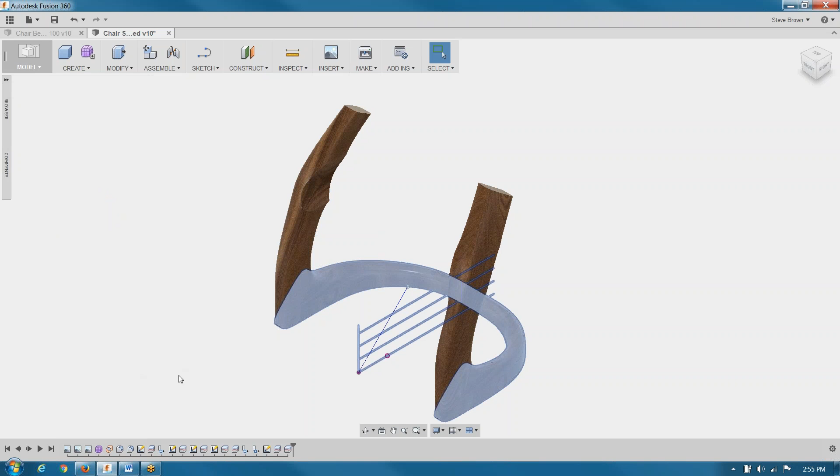The other thing I've done is made this multiple components, right? So we have a left leg, a right leg, and this bottom hoop, which is itself cut into a laminated structure. Let's take a closer look at that. I'm going to turn off the other legs and activate this component, which is the bottom hoop, and we'll look a little closer.

Probably don't need that sketch on anymore. I noticed the light bulb, so it's real clear to show—pun was not intended—but the light bulb visibility, turn it on and off, very easy.

So this bottom hoop in itself is multi-bodies, right? Because we've said we're going to glue this up before we carve it. I'm going to turn them all off except for this one, which really shows this grain structure quite nicely, and that's the reason I wanted to come over here and not spend a bunch of time on the grain back on the whole chair. This is probably much more representative of what you would see in a real world environment.

So now if we start to manipulate the texture maps as we did before, you really get a feel for it, at least I do, because I don't work in this field every day. As I move the center, the heart wood, I can see that because of where I'm cutting it, the grain looks different on the beveled edge than it does on the side. But Fusion does a really good job of making sure that wherever I move it, it faithfully represents what that would look like if I really cut a piece of wood and carved it down.

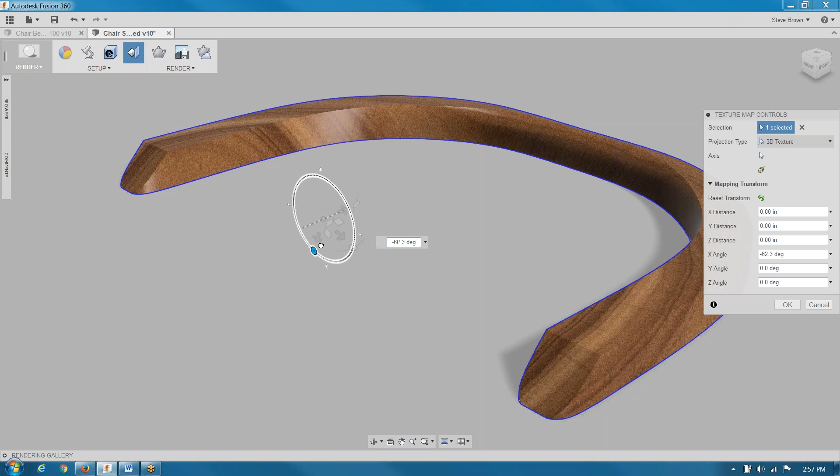Now, if I rotate it 90 degrees, I think that also shows how that grain moves around. I was really quite impressed with this, and now I can't stand walking through a room without looking closely.

I have to thank Steve Whittam for this. I look at every piece of furniture now that I pass, it's not just the chair anymore. I really look close at it to see what did they do, how did they carve this. Some of the images Steve sent me were truly amazing, showing what people are doing out there.

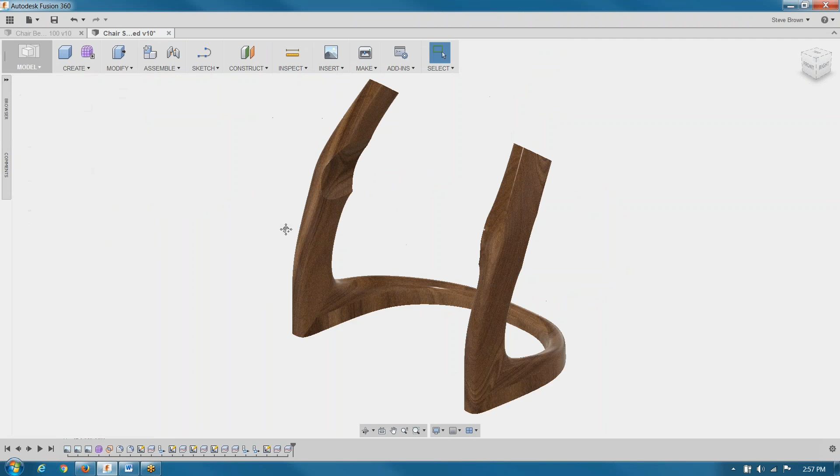So there's a quick look into slicing it up into more of a real world view. If you have to make a fab drawing for these, absolutely, once these are busted up into components like I've done, you can apply things to them. They have a name, I just used leg bottom, left and right, but you could put a proper part number in there. You get quantities too, so if there's multiples, the material can be applied to each one.

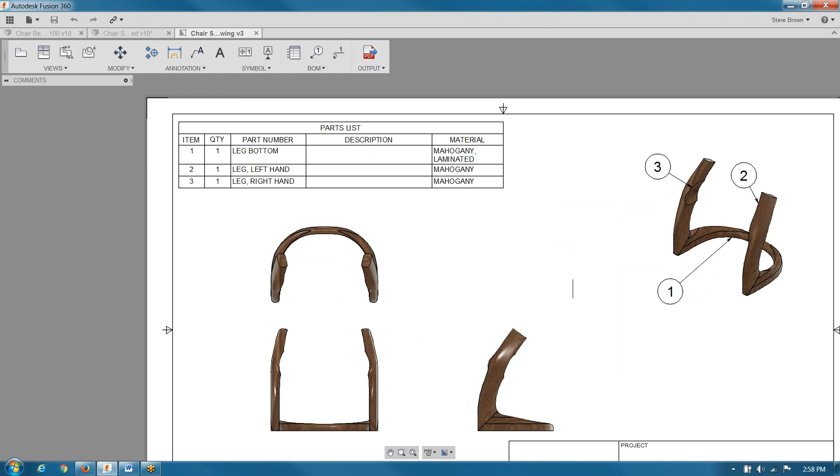You get the parts list and the balloons, as you'd expect. It's not anything new, but it's good to know that with all the T-splines and that sort of functionality, you're not left with no way to document your design.

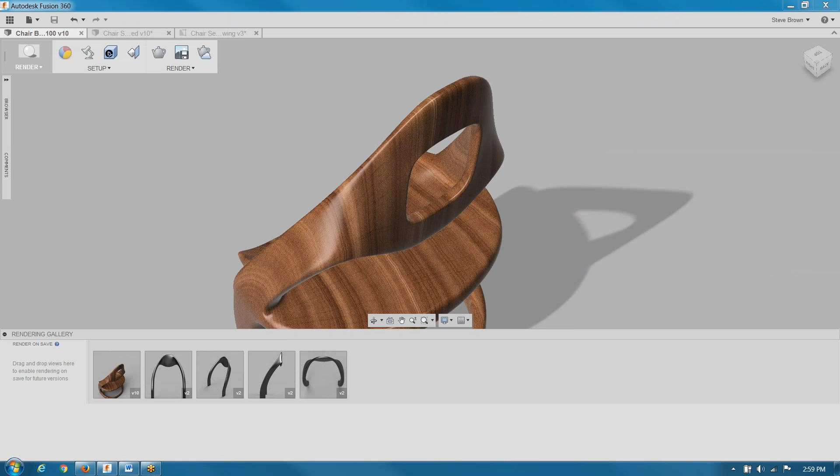So Matt, I'm going to change the presenter to you, if I can do this without missing a button. That's okay, Stephen, you can stay on that screen for now. Thank you very much, and great job.

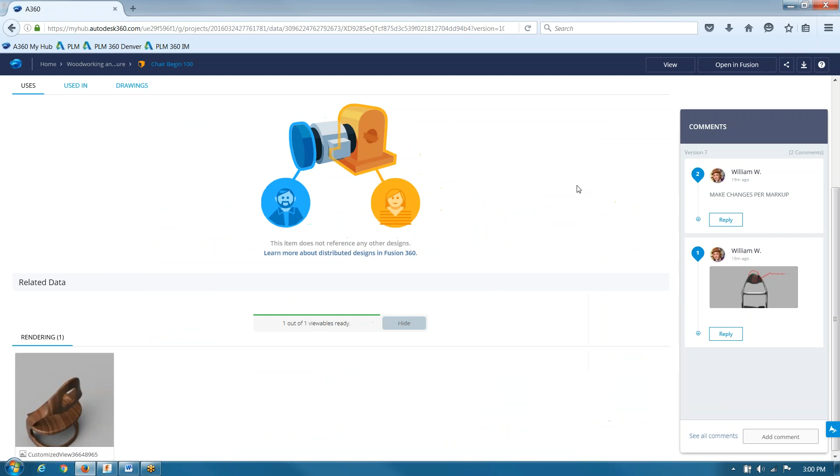Well again, thank you very much, thank you Autodesk, I appreciate Steve and Matt's help. This is great. I wanted to present this tool to our group because it's probably one of the first tools that really thinks the way that I build. And even though we're not really showing joinery on this particular chair, you could see this can, of course, be cut up in sections. Joinery could be added, milled, machined, so that we get the results we want.

The other thing about this is it doesn't have to stand alone, it's fully compatible with products like Inventor. So sometimes we will move this into Inventor and augment it even further, so there are lots and lots of possibilities here. I started doing things like hand-carved items, and these are all possibilities that with conventional software we've been using in the past are just very difficult to work with.

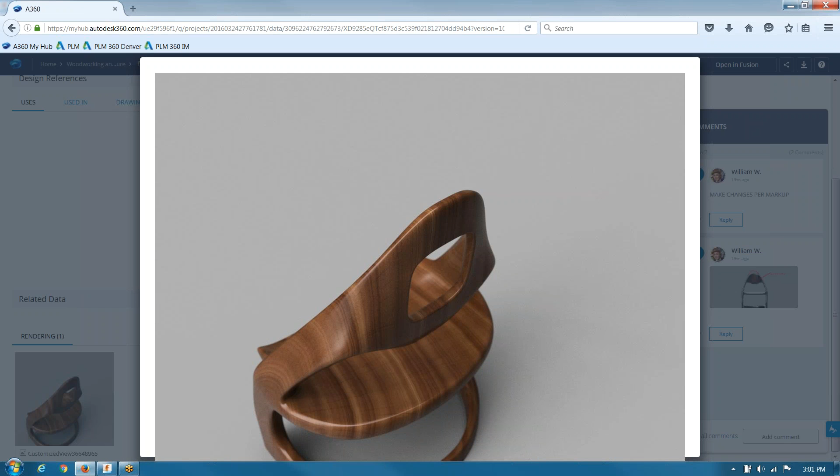So I'm hoping that what we showed today allows a lot more freedom in the design side of things. You know, many people look at furniture as just very rectilinear, but a little more tooling to it simply can create dramatic effects that really will differentiate one's design from others.